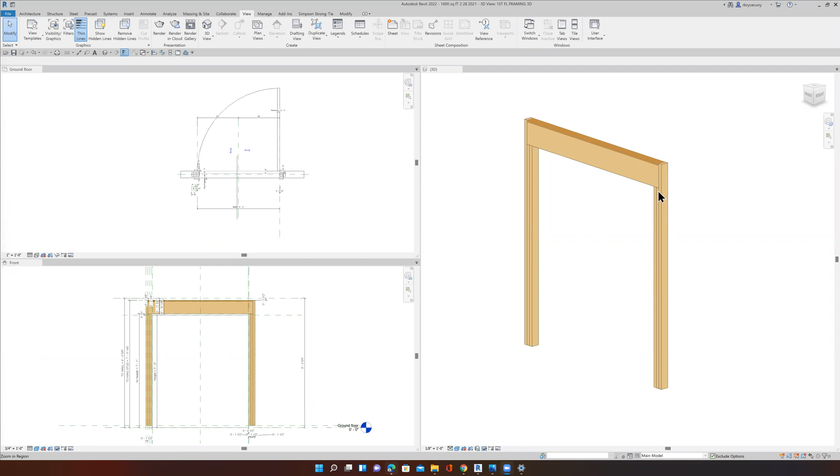So I have made a three-dimensional framing with two jack studs and one king stud. And it's framing for the doors, and it's within the actual door, the flush panel door. So it flexes. It's 2x10 headers.

Now let's take a look here real quickly. I use an 8'0" and 5/8 top of wall, meaning I have 5/8 inch gypsum board as my ceiling. So I've left 1.5 inches for a top plate to go all the way across, but then I have my 2x10 headers and a piece of plywood to make up the difference, with a 1 inch gap for deflection of my headers and a 7-foot opening.

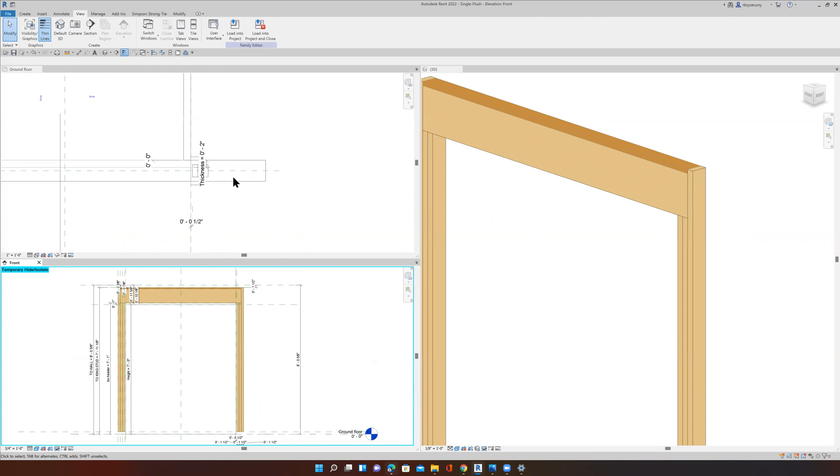So I'm going to load this up to RevitCity so you can download it and use it. But when you insert the door into the project, the framing comes with it.

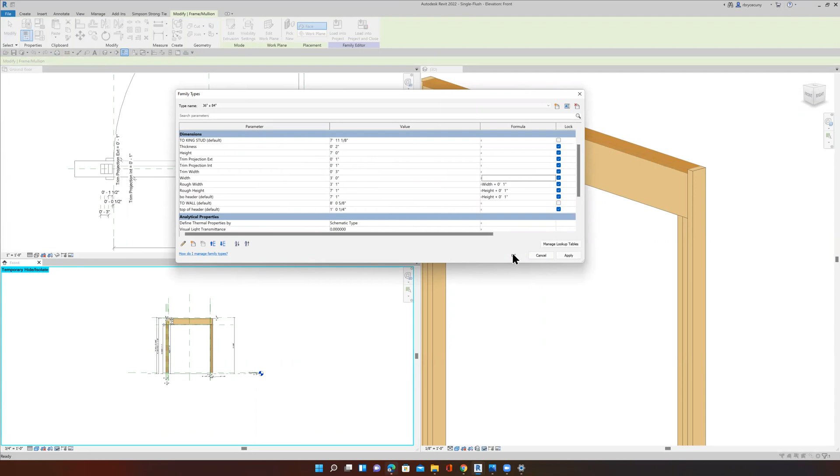And so you can flex it. We'll take a look, flexing right now - I think it's at 6 feet wide. So I'll take this and flex the width to be 3 feet. And you can see that everything flexes. That is just simply part of the door.

If you want to see that in your plan view, then you can. And if you don't want to see that in your plan view, well, of course, you can go to visibility graphics and turn off your structural framing, plain and simple.

Now I like... let's see here. I like to frame my buildings so that if there's something that needs to be addressed, I'd rather address it in the comfort of a very nice office chair in controlled humidity, as opposed to being out at the job site where it's cold, wet, perhaps windy.

Usually meetings on the job site happen because I need to help - I was going to say I made a mistake, but I'd rather say I just need to have a conference with the carpenters as they're doing something. I'd rather figure out something in a comfortable environment, my office, as opposed to a job site. It's generally, you get called out to the job site on those beautiful sunny afternoons where I'd like to be outside.

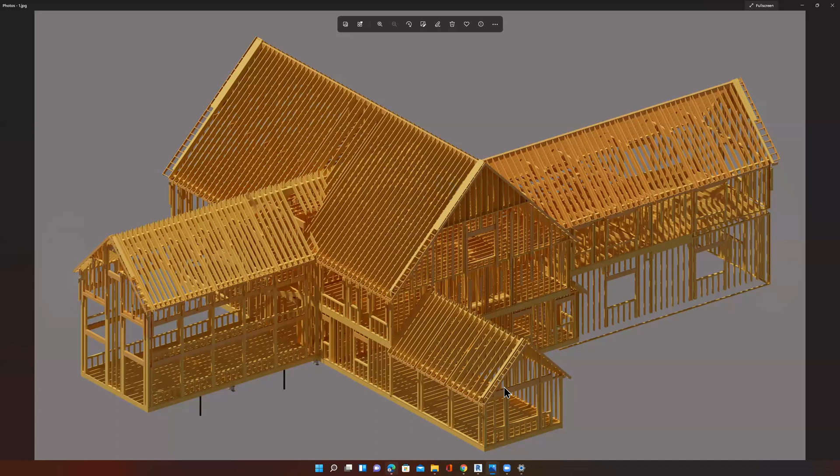So anyway, I like to figure it out ahead of time. That's why I want to put my framing in for my doors, because it takes a long time to put these structural members in. And if it's already in there, it's already there. That seems to be a good time saver.

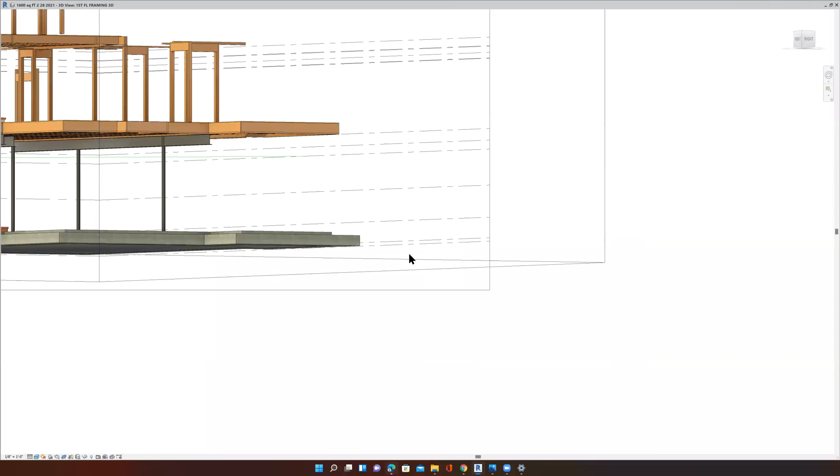We'll talk about it in a second, but you can see as I'm framing the project, beginning to frame this one, the doors - I should turn off the walls - and my doors are already framed. I just put my bottom plates and my top plates in. I also have a program that goes straight across and arrays my studs in at 16 inches on center.

I have used another program called StrucSoft, and I'll put a link to that down in the description. It's a wonderful program, very, very elaborate.

I was demonstrating Revit for a company in Boston. As part of the 3 or 4 day - I think it was 4 days - of training, I also showed them StrucSoft because it seemed fitting; I demonstrated that for a day. At the end of the fourth day, it's a big company, huge company, and they decided that not only were they going to transfer their workers from AutoCAD to Revit, but they were also going to buy StrucSoft because they could really use it.

And it's a wonderful program, but for me, it doesn't allow me to think. It just frames everything. You set the constraints and how you want your doors and windows set, and then basically it goes in and does it all. I'll put that link down there, but I like to think about what's going on in my projects, and spending a little bit of time framing it makes sense.

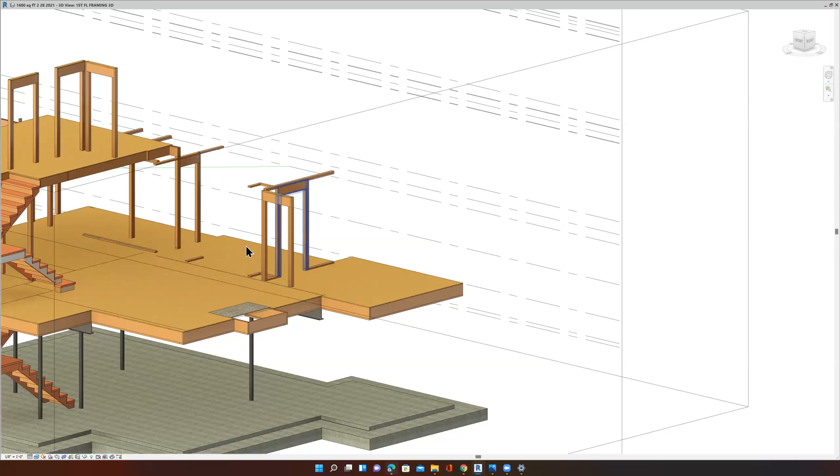But anyway, you can see here all of my doors. This is a small house, but all of my doors automatically get their framing in there. It's pretty simple. Then I'll come back in and put my bottom plates and my top plates and frame it out. But what I was saying here is, here's the door.

And really all I have is just added into that standard door the framing for it.

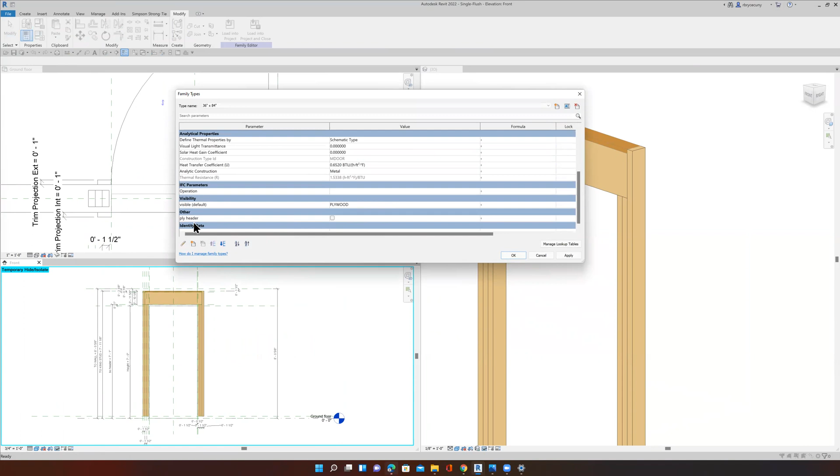and then test it by flexing it, taking a look at your dimensions and your constraints here, and just determine what you want to check, test it out, see if it works. And the one thing is the visibility. I did turn the plywood header on and off. When I'm framing, that header gets in the way.

That little piece of plywood gets in the way from me seeing in the floor plan as I'm putting in my 2x4s at 16 inches on center. It makes it difficult for me to see because the header's above here, so I can't see them. I couldn't figure out any other way, even with the reference plane, the visibility, the view range, cutting way down here. I still was able to see that, so I just made it a yes/no visible feature,

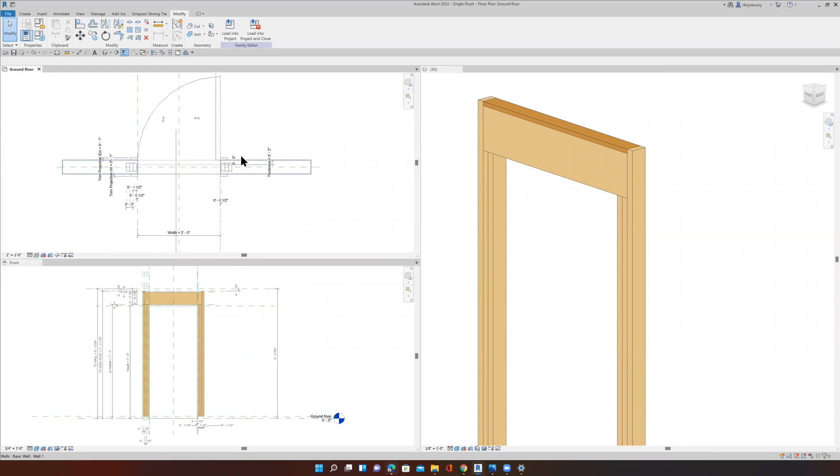and then I can see this piece of plywood goes across these two, and I want my bottom plate to go to here, but I couldn't see that with that in the way. So anyway, that's just a personal preference. I just turned it on and off. Now, one of the things that I want to point out, some people have a little bit of difficulty is they say, well, we can't see the casing in our floor plans.

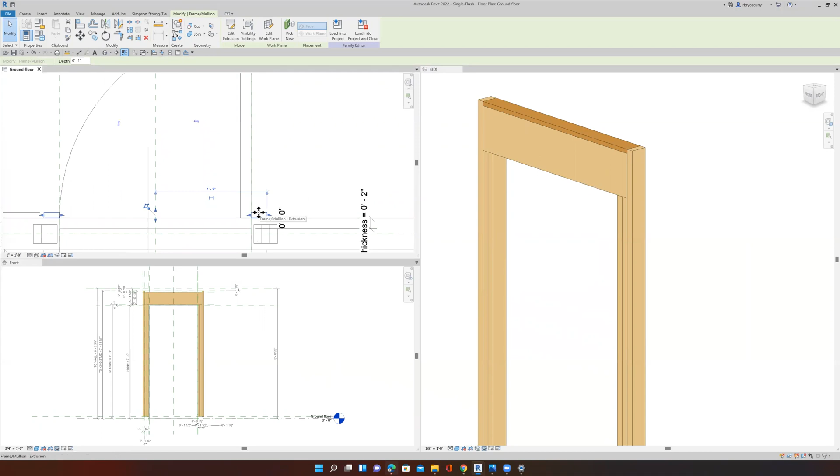Now here is the family, the door family. I just took our standard door family and put my framing in there, but you can't see the casing generally in a floor plan. So if you simply highlight this as an extrusion, go to visibility settings, then you can say right here when you want to see it. So you can check that and say when cut in the plan, then you can see it.

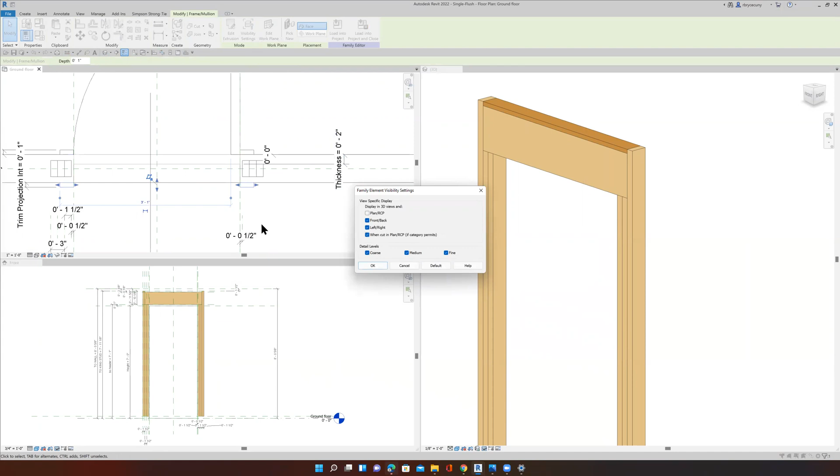But now the other thing is that this is one extrusion and this is another extrusion. So you could actually set that up so that you could only see one extrusion or the other in the plan view if that's how you wanted it. So that's the secret, because this door comes with that unchecked in the Revit programs that I get year to year, that's always been unchecked. So we want to check it. And then just simply load it into your project and use it.

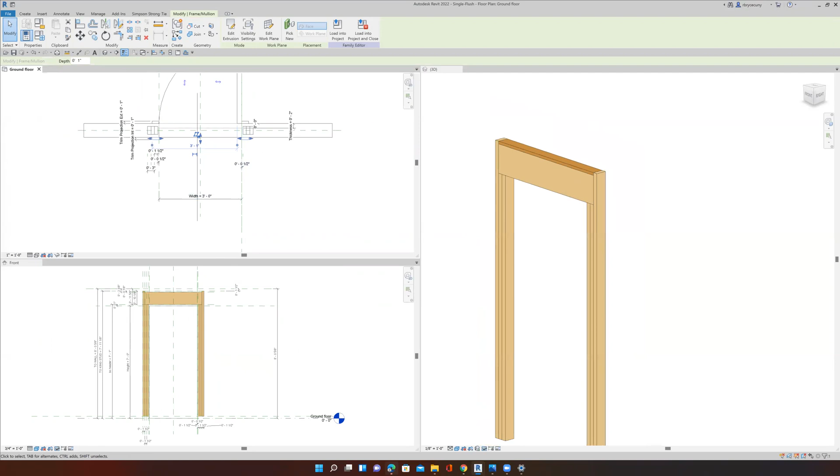I think it's a really nice time saver. Something that I want to do on my projects anyways. I want to see how these are going to get framed, and if there's an issue about the framing, figure it out. Generally, I'll see it in this project. Let's see. So you're seeing here the room separators here. That's all that is. You don't want to see that in here.

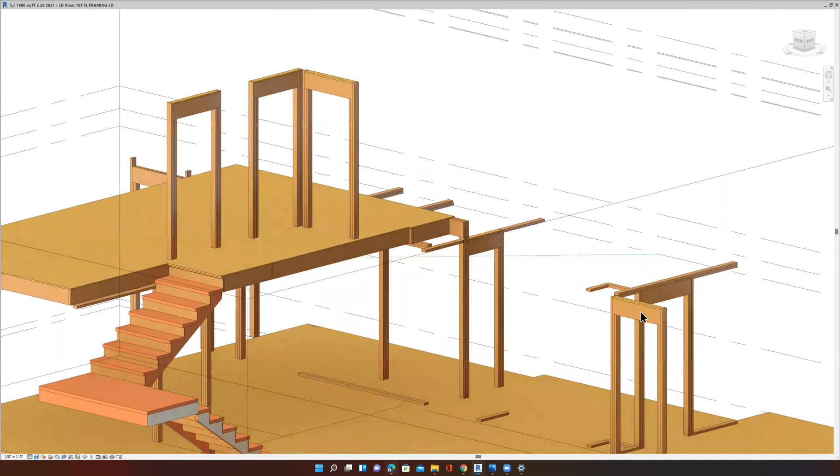Now this is only for 2x4 stud walls. Generally, the interior walls on my houses are 2x4s, but sometimes they're 2x6s. Even in this house, I have some 2x6 walls because they're 2 stories tall. So I don't have this used enough yet to fine tune it. Once I fine tune it, then I'll go in and make doors for the 2x6 walls. Not a big deal. It's pretty rare that happens anyway. But it does.

All right. So anyway, another tutorial in a way. It's more just a hey, here's a nice parametric framing for the doors if you want to use it.